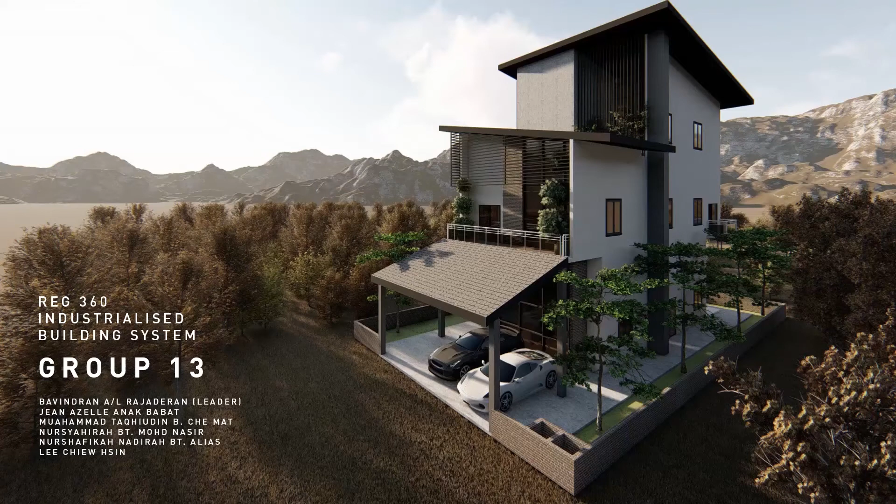This is a presentation for REG 360 Industrialized Building System. We are from Group 13. We'll start the presentation by explaining the design concept and how this design came about.

We approach this design with a contemporary and minimalistic style, perfect for a modern family and a family looking for an upgrade to their house. We finish the design with touches of industrial style. The key influence of this design is the approach of being sustainable, where we try to harvest as much sunlight to the common area of the house.

For instance, the stairwell is next to a curtain wall. The staircase takes up a huge space of the house, especially when it's located at the center of the house. If it is well lit throughout the day, it will brighten up the house. This will significantly reduce the cost. We are also aware of the heat gain through the curtain wall, so we utilize the stairwell as a heat buffer. So at the center of the house, it wouldn't be as heaty.

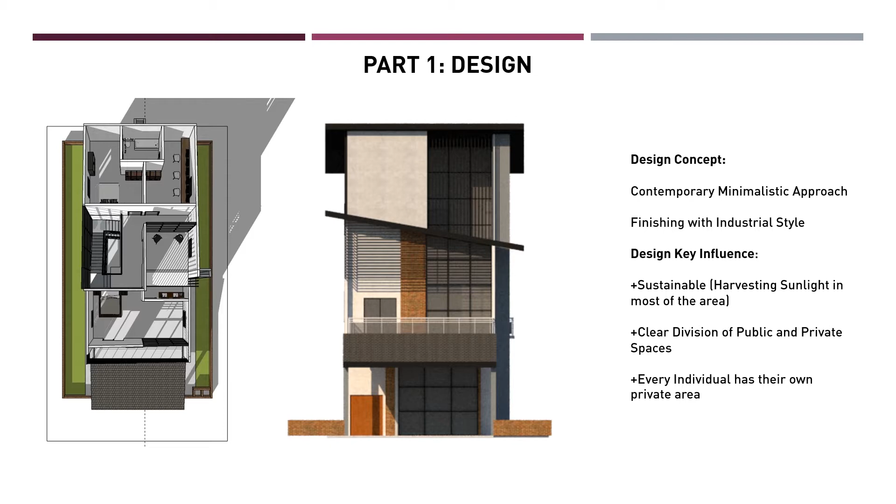We also propose a clear division of public, semi-public and private spaces. We gave each individual room sufficient space and access to natural sunlight. Proceeding to the layout of the design, shaded in dark grey are the common areas for the family members.

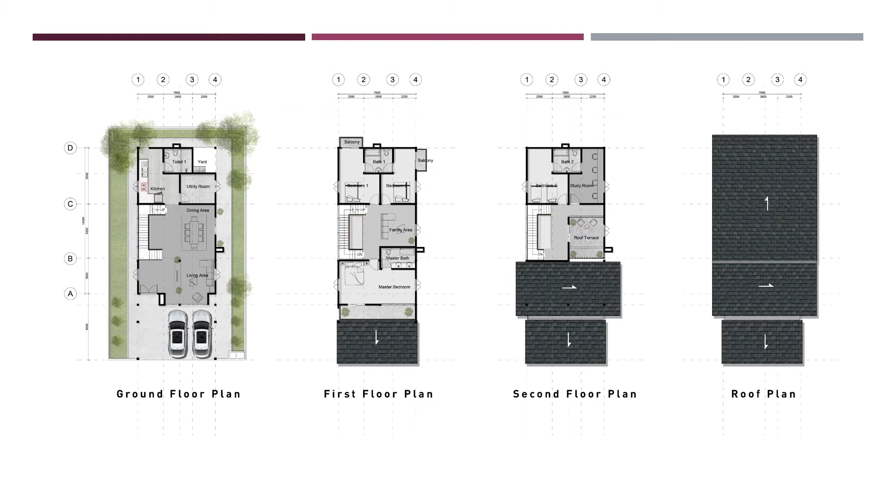The rear end is targeted for the private areas, and the ground floor is only for public and semi-public areas like the living area and the dining area where the owner could entertain their guests, and at the rear end is the kitchen. Going upwards, it's only semi-public and private spaces where the rooms, family area, study room and the terrace are located.

Here's the technical drawing of the floor plan. The total floor area is 307 square meters with a width of 7,500 millimeters and a length of 14,300 millimeters. The door and window fittings and the columns are in compliance with MS 1064, which will be further explained in depth by my friend later on.

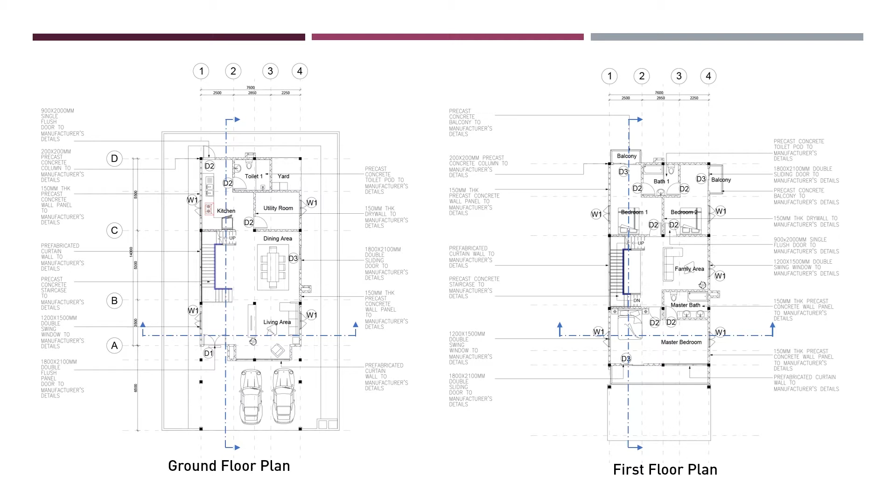We also use a precast concrete staircase that will eventually be fitted into the house, and also a balcony that is precast to be assembled on site. The next part will be continued by my friends.

The elevation. This elevation is for the townhouse building, which has a ground floor, first floor, and second floor. The height of each floor is 5,000.

The front elevation shows the curtain wall as a main feature, with the large glass opening to allow a lot of light into the building, and the side elevations show the nice proportion of the three-story townhouse. The design of the stylish roof gives the building a modern look and does not look too boxy at this stage.

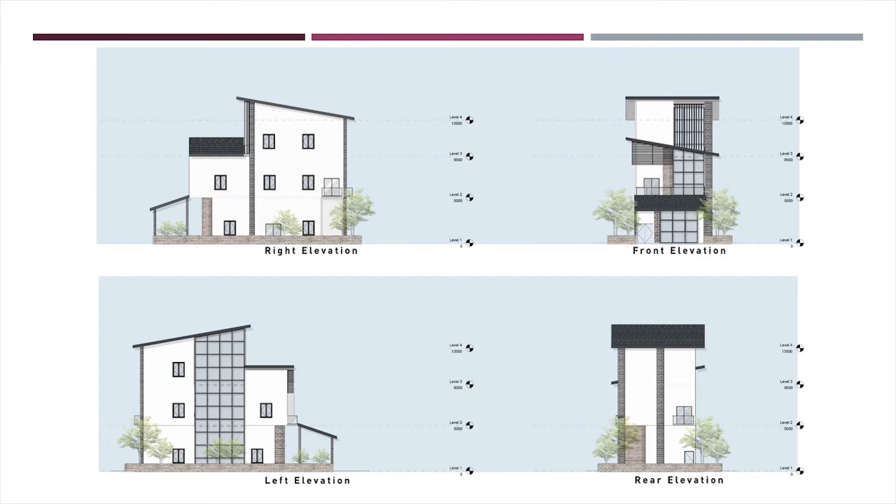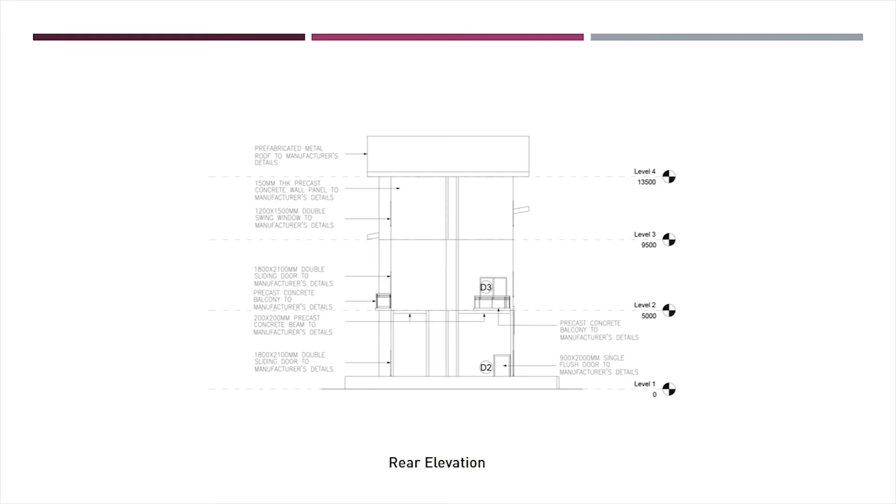The materials I use are shown in the front elevation, the right elevation, and the rear elevation. The section shows the inside of the house, and the many openings make the space look light.

Hi, my name is Jean and I'll be talking about the structural layout of our townhouse design. So first off is the beam layout. All the beams used for our building have the same width and height, which is 200 millimeters by 350 millimeters. This is considered a preferred set of dimensions under the Malaysian Standard 1064, which we need to comply with because we want to obtain a high score for our IBS scoring later on.

So we took that into consideration when we decided on the beam placements for our design. We measured the length of each beam from the midpoint of one column to another. We did this for all the columns in the townhouse, and that's how we got the beam component schedule, which is in the next slide.

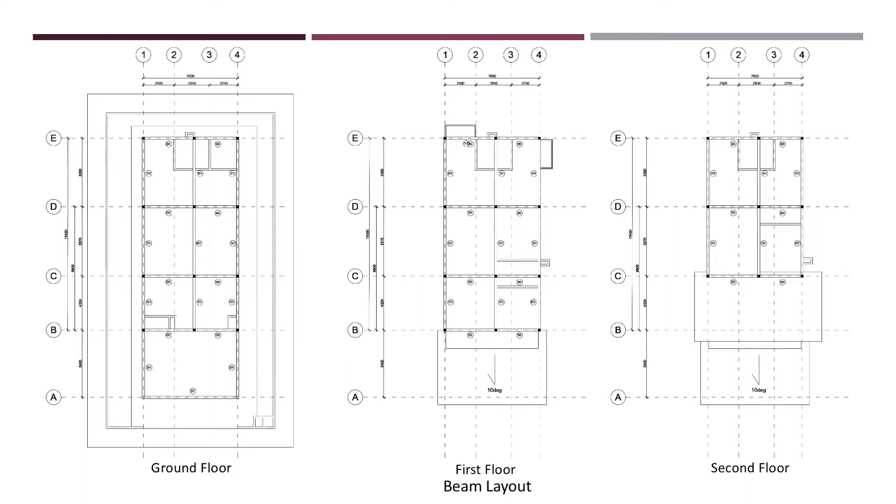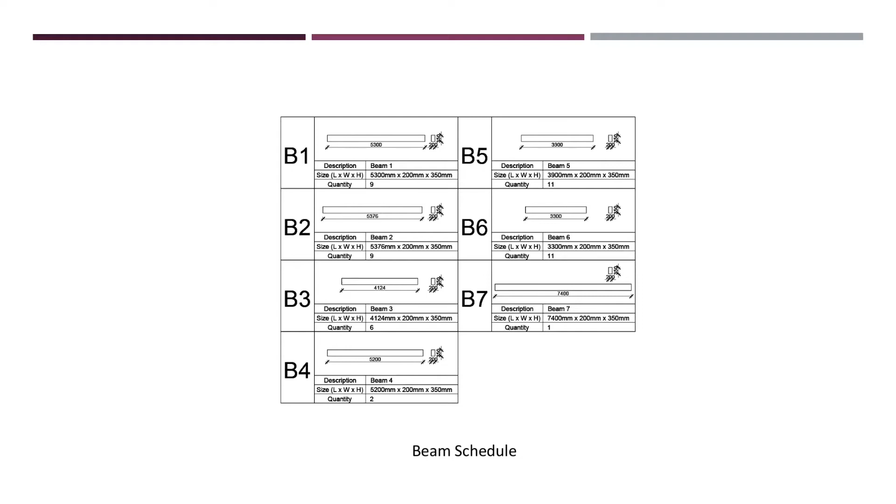This schedule shows the different types, sizes and quantities for each type of beam used, and we can see that there are 7 different types of beams. This kind of coordination is actually a good way of keeping track of all the beam components.

Next, we have our slab layout for our townhouse design. We use precast concrete slabs as our flooring system, and the sizes are also all coordinated to comply with the Malaysian standards. For all the slabs throughout the 3 floors, we use the same thickness, which is 150 millimeters, except for the toilet pods, which have a thickness of 100 millimeters.

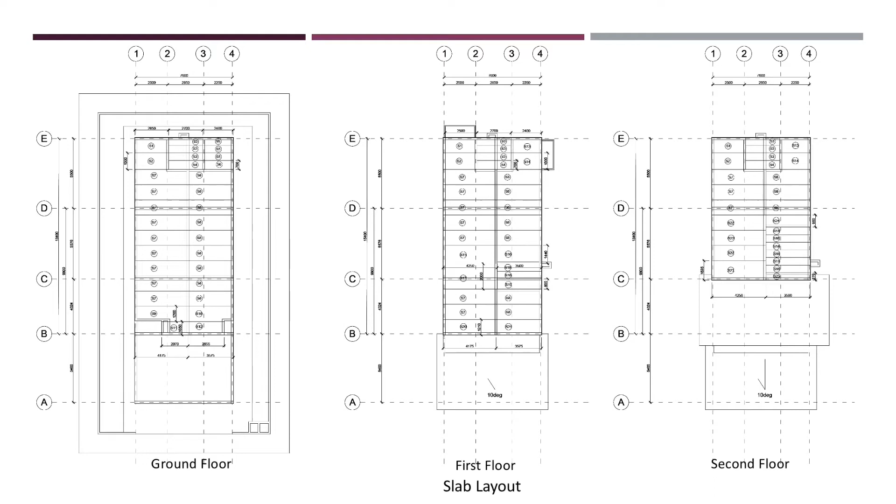So we can see here in the structural plans that there are different types of slabs used, and we've actually used 25 different types of slabs because the spaces and rooms in the house all have different dimensions, so we had to adjust to that. But there is a certain floor area for each floor where the layout is repeated. So this is where we utilize vertical repetition, which is something that we learned and came to understand as we went into part 3 of the IBS scoring system.

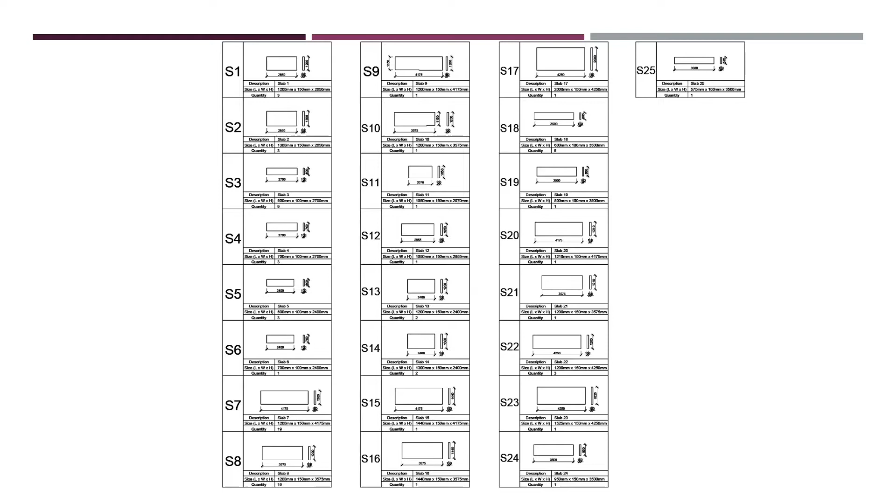So the next slide shows the slab component schedule and how many quantities for each type of slab there are here. And that's it for my part.

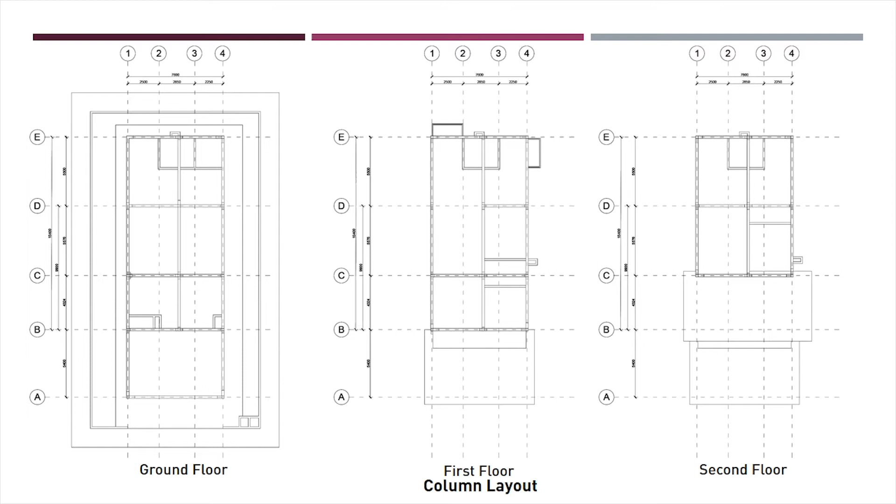Detail columns. So we have 3 types of detail columns: column 1, column 2 and column 3. Column 1 size is 550 times 150 and quantity is 12. For column 1 we have two corbels on side faces of the column. For column 2, size is 1300 times 150 and quantity 18. We have 3 corbels on side faces of the column. Column 3 has 4 corbels on side faces of the column. Size 850 times 850 and quantity is 3. So this is all about columns.

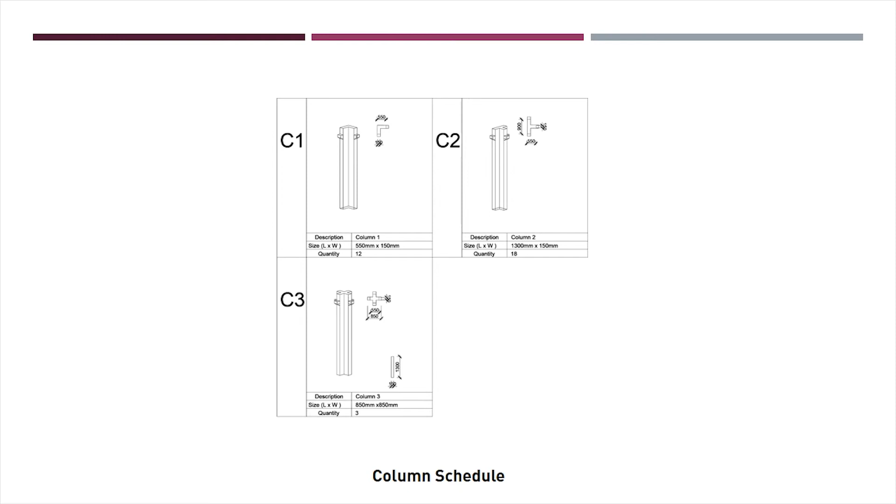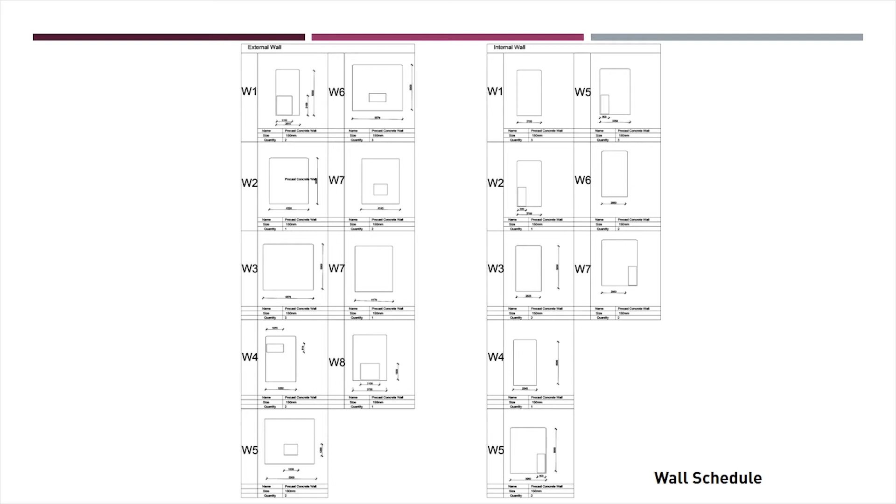We have to label the external wall. We use precast concrete, and then for the parts that are not suitable for precast, we use in situ. So as stated earlier, we are using one type of single flush door, one type of double sliding door, and only one type of double flush panel door. There are 13 units of single flush door, 5 units of double sliding door and 1 unit at the main entrance for the double flush panel door. All comply with MS 1064.

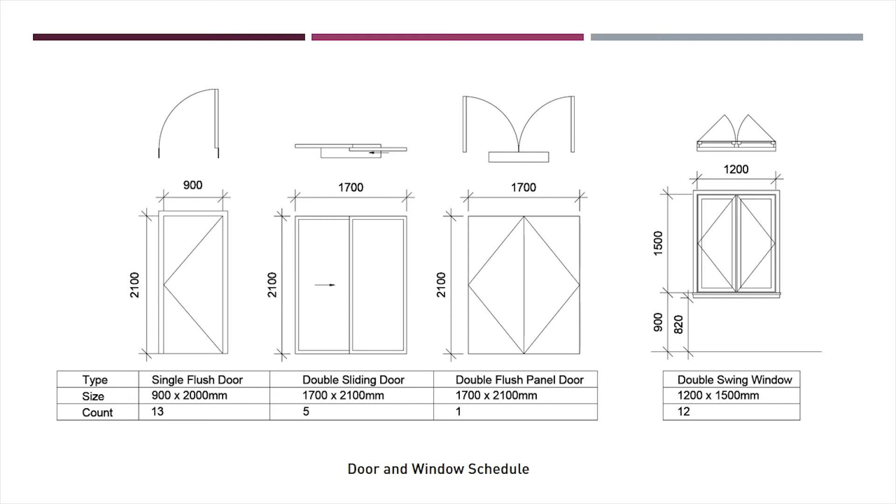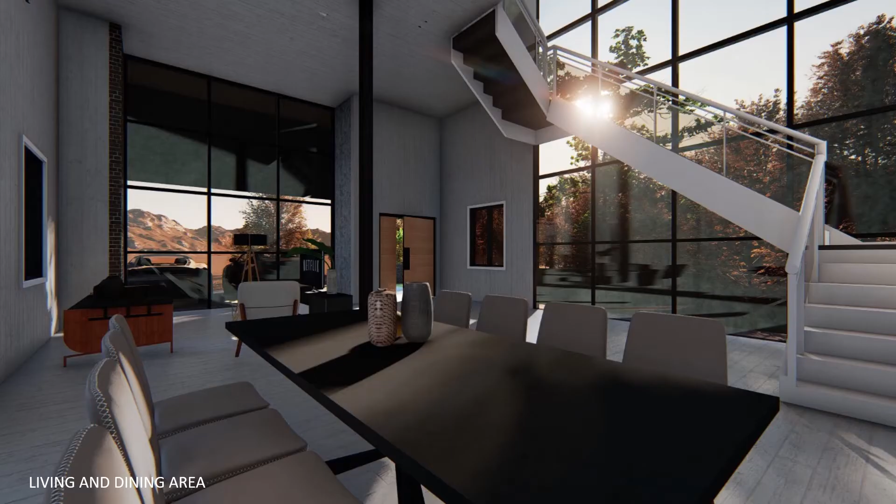And this would be the living area and the dining area at the ground floor, which you can see are connected right beside each other. And the interesting part of this area will be the curtain walls, where the users can connect easily with the nature outside. And as you can see, the users can also experience a good view when they use the stairs to go up to the first or second floor.

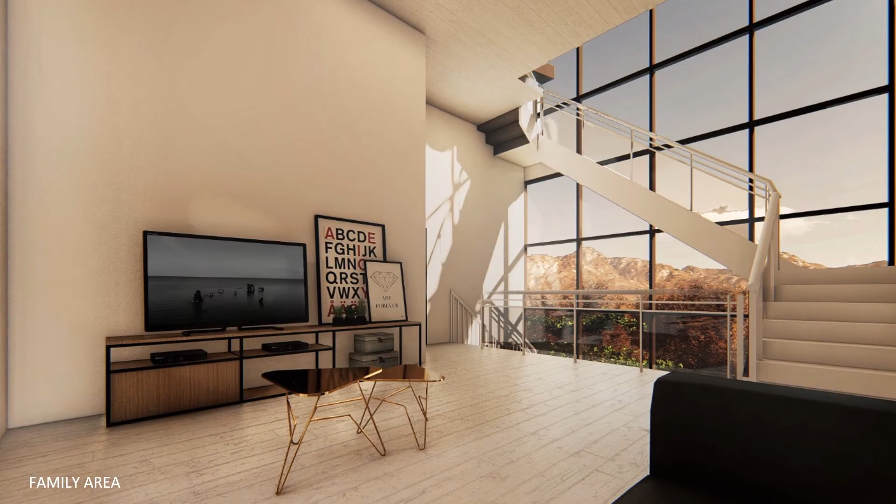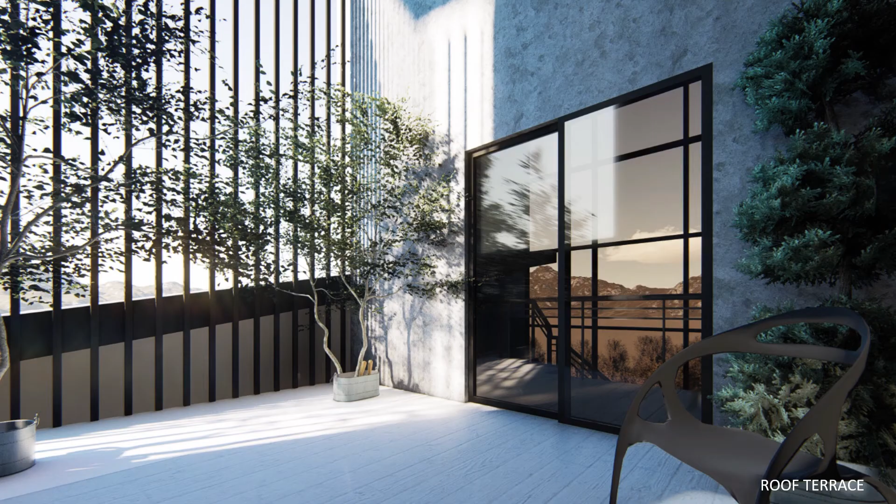And lastly, one of the most interesting parts of the house would be the roof terrace, where the family members could easily get connected with nature in the open area. And we have also introduced vertical louvers, which also act as a shading device to control the amount of light getting into the house. And it also creates a comfortable area for the family members to rest.